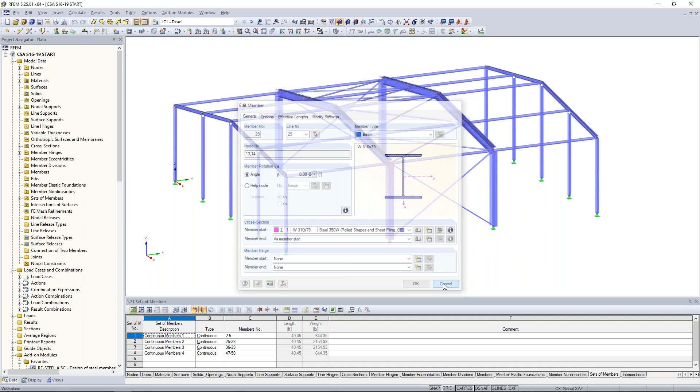Material is steel 350W. The member type is just a typical beam member, so this would be any type of beam or column. Everything for these frames is fully fixed, so the member hinge is set to none, which just means that all forces will be transferred where they're connecting to other members. If we take a look at the exterior members, on either the left or right side, similar concept.

We have moment frames here too, but a much smaller member, a W130 by 24, steel 350W. Member type is set to beam, fully fixed.

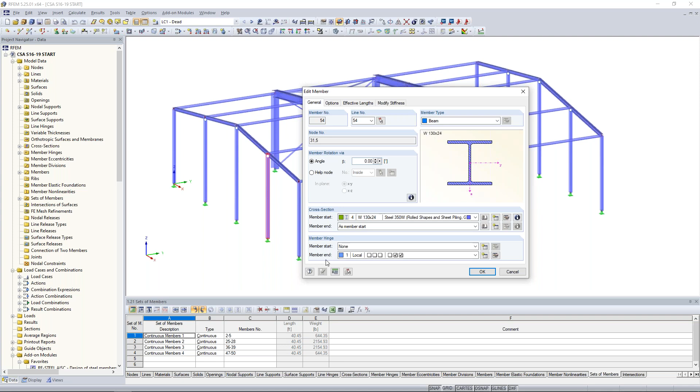For our interior columns though, you'll notice we have a special symbol at the top, and all I've done for these W130 by 24 is apply a moment release at the top of the member. That graphic is shown here within RFEM to represent this moment end release that I've set directly within this dialog box.

We also have these purlin members framing in between our frames, and they are set to the member type truss. The member type truss just means that essentially we're going to apply that moment release internally for the calculation, so it's grayed out down here at the bottom because the program will automatically apply that for us. These are just typical HSS 127 by 4.8 steel 350W sections.

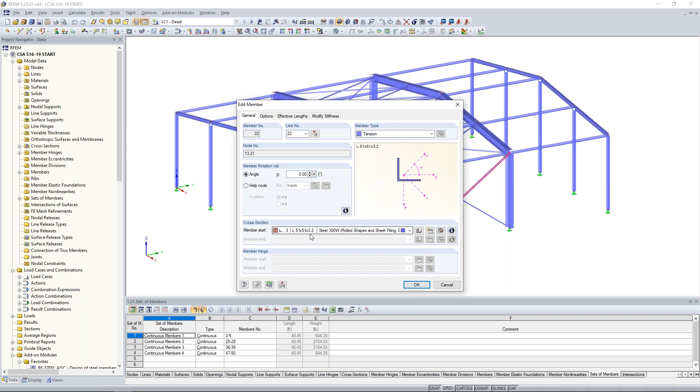Now, in a similar sense, we also have our lateral bracing here. If I double click on this member, these are single angles, L51 by 51 by 3.2, steel 300W. The member type here is set to tension only, so this member can only take axial tension forces. If it has any compression, it will automatically be removed from the iteration.

RFEM will allow this member to be reactivated if a tension force is reintroduced to it. And once again, we're going to apply those moment releases at both ends as well as shear releases, so it's only transferring those axial tension forces.

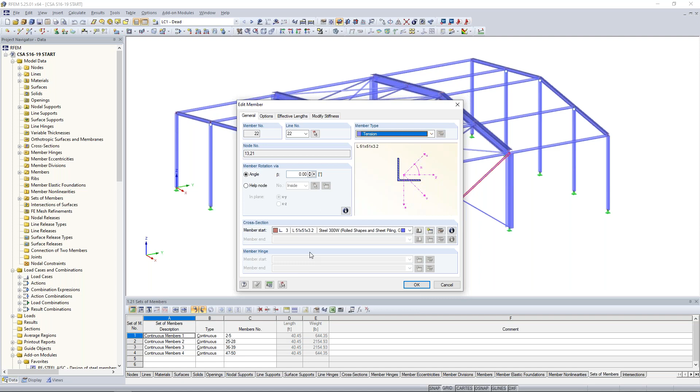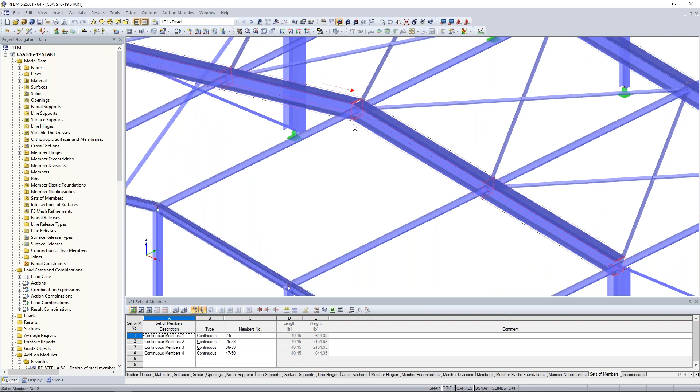Now you'll also see that the main rafters here are split into individual segments, and this is fine for analysis purposes, but later on when we get into design, I'd like to consider these as one continuous member. So what I've done is hold down my control key to select all 4 of these segments, and right click to create what's called a set of members. All this does is group together these individual segments for design purposes. It does not affect the analysis whatsoever, and this will make more sense once we get into the add-on module. You can see the symbol here, a faint dotted line grouped around these 4 individual members.

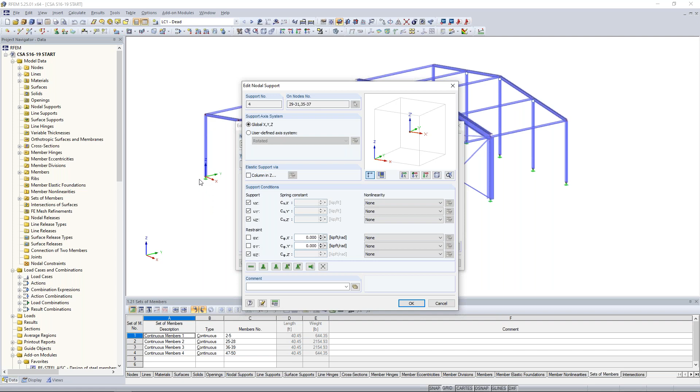Down at the bottom, you'll also notice we just have typical nodal supports applied. If I take a look at the detail settings, we have 6 degrees of freedom. I applied a support within translation directions X, Y, and Z, and also added a restraint for rotation about the column's own axis, so it's not free to rotate in torsion. That summarizes a brief introduction to the steel members, the materials used, and the types for this example.

So what we'd like to get into next is just a brief introduction to the loading. I'm going to turn on my load cases and combinations dialog box, and you'll notice I have created 4 load cases: dead load, snow load, wind in the X, and wind in the Y. Now all of these are set to the action category according to the NBC standard, which affects our load factors for our load combinations. Nothing too complex here.

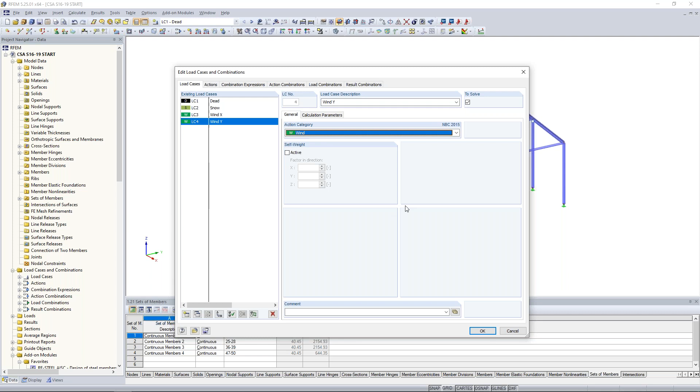Once we have set up these load cases, we need to actually apply the loads within RFEM. So I go back to my graphical display and notice I have dead load selected within my drop-down box. Now I can turn on my loads graphically that I've already applied to the structure. Notice I have just a point load at the top of each one of these columns, and I also have a distributed area load.

I created this automatically within the program. Under Tools, Generate Loads, we can create an area load on members via a plane. Within this dialog box it's really quite simple - I'm just applying a magnitude of negative 0.02 kips per square foot in the global Z direction, and then I select my corner nodes that it's going to apply for this plane back here in RFEM for the roof.

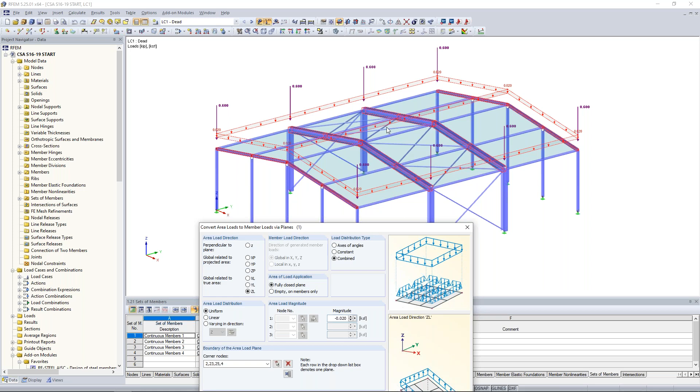Now I took it a step further and said, okay, I'd like this area load to only be applied to my main rafters here, not the smaller purlins. So I can take any one of those purlins, graphically select it, such as member number 33, and then all purlins parallel to member number 33 will automatically be deselected when it comes to this area load. If we take a look at this generated area load, I can right click and display separately, and notice only the rafters are affected here. The magnitude is given to me before I run the calculation, just based on the tributary area of each one of these sets of members.

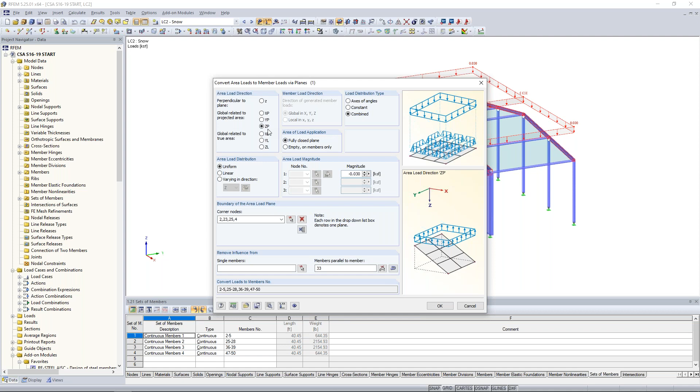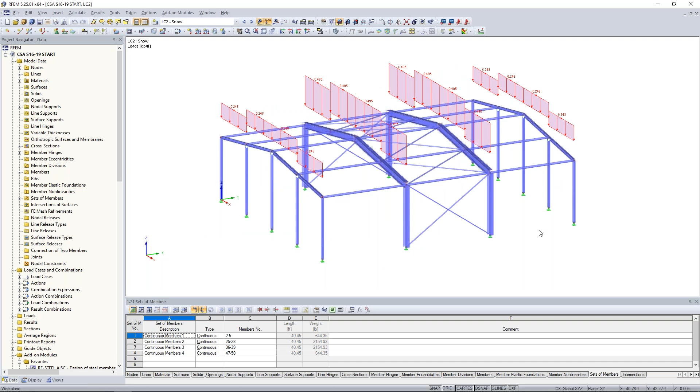Now I also created this snow load in a very similar fashion - this was also a generated area load. The difference is I wanted to change the magnitude slightly to 0.030 kips per square foot, and I applied it in the projected Z direction. The difference between projected versus global is that we take into consideration the angle of this roof for the applied magnitude of the snow load. If we have a very steep angle, we'll see less snow load than on a roof that was completely flat. So when we take a look at this generated area load, we can right click to display separately, and here's our projected snow load on each one of those rafters.

So I've also applied a wind in the X direction, pretty simple application here. According to the global X axis, we have our wind flow from left to right. Over on the left for our pressure face, these are just standard member loads that I've applied to each one of these members. Over on the right-hand side, we have a suction force, again with those typical member loads.

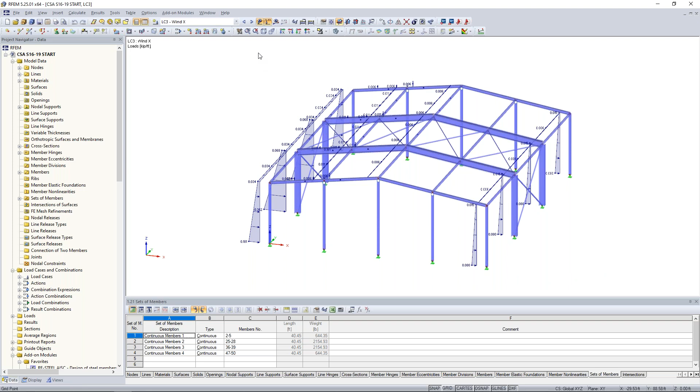Wind in the Y, a similar concept, except we're going to have wind flow according to the global Y-axis from right to left. We have our pressure face over here on the right with member loads, and then a suction force on the left with those member loads.

So now that we have created all of our load cases, the next thing to do is combine them into load combinations. When I first created the model, which we can access under the General Data tab by right-clicking on the model name, you'll notice that I selected the NBC standard to automatically generate my load combinations. Within this dialog box dropdown, we're also seeing the ASCE 7, the IBC, Eurocode, and other international standards.

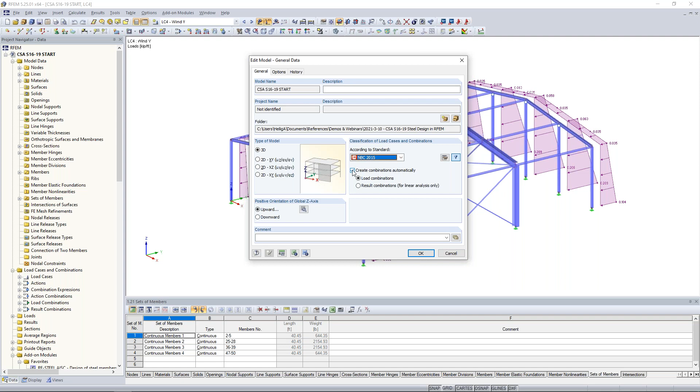When I have this option checked, we'll automatically generate load combinations according to the standard selected. I also have the ability to uncheck this option and instead manually create my load combinations. Once we have our standard selected, we go back into our load cases and combinations, and jump to our combinations expressions tab.

The program's telling me it's going to generate those factored load combinations according to the NBC, our ultimate limit state. If I'm curious to see those, I can click on this info button, and see directly what the NBC calls for in terms of those factored load combinations.

We also have our serviceability, or unfactored, load combinations listed here. According to the NBC, we have a few different options for serviceability, and again we can click on this info button to see exactly how those will be generated.

Most importantly is to jump to my load combinations tab, where we can see our factored load combinations generated here in red, and our unfactored ones in green. This is only considering the load cases that I input under that first tab — dead, snow, and wind.

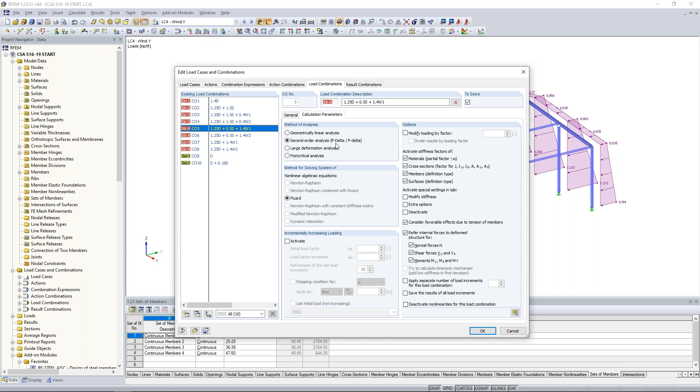Now, it's important to know that under the calculation parameters, by default we're automatically going to consider a second order analysis for all load combinations. You can change that here, but most standards — which we'll get into in more detail in a minute — do require a second order analysis. RFEM will consider big P-delta and little p-delta effects when we select this option.

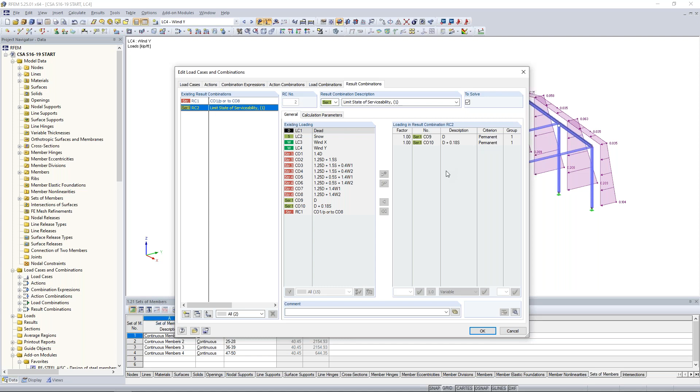And finally, we have a results combination, which is nothing more than an envelope solution. So we have a results combination for our factored load combinations and one for our unfactored load combinations. This will provide us with the max and min internal forces, deflections, and so on, if we view these within the program after the analysis.

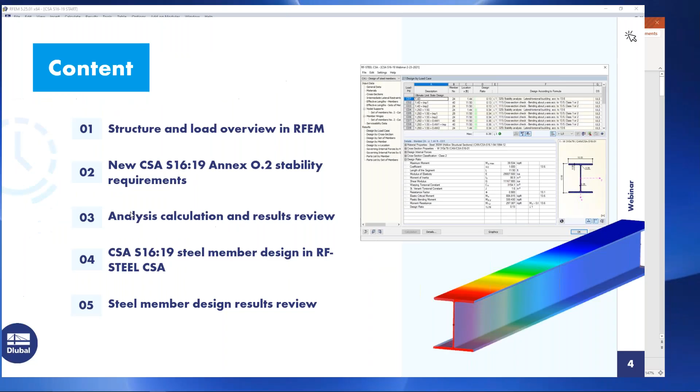So now that we have gone over the initial modeling and the initial loading, I want to jump back to the PowerPoint to begin our discussion about stability considerations.

If we refer to the CSA standard, and in particular clause 8.4, the code tells us we must consider structure stability for the overall design. These stability requirements are elaborated on in clause 8.4.1. We should consider deformations, big P-delta, little p-delta, geometric imperfections, stiffness reductions, and uncertainty in stiffness and strength.

There are actually a couple of different methods of analysis and design for stability, provided in clause 8.4.2. The first, which is nothing new and has existed within the CSA, is this simplified stability analysis method according to 8.4.3. Most of us today who have done design according to the CSA standard should be quite familiar with this section.

But what has recently been added within the 2019 standard is Annex O, and in particular Clause O2, which now defines an alternative method for stability consideration effects for an elastic analysis. We're going to get into this quite a bit more today and apply it to our example.

But before we do, I want to cover the simplified stability requirements. Most of us should be familiar with this according to clause 8.4.3. This is the initial method, and it only has a couple different requirements listed here. The first is to consider big P delta effects according to 8.4.3.2.

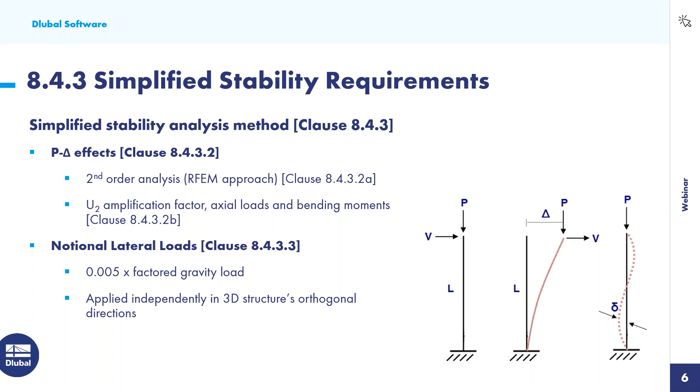It's important that these notional lateral loads be applied independently in the 3D structure's orthogonal directions, and in such a manner that we're getting the greatest destabilizing effect. So let's say we have lateral load for wind in the X direction—it makes the most sense to apply these notional loads in the X direction as well for the greatest destabilizing effect. For wind in the Y, we'd apply a notional lateral load in the Y direction as well. That's really just a quick overview of this simplified stability analysis method, but let's get into the new Annex O.

In particular, we're going to refer to stability effects and elastic analysis according to Clause O2. So there are a few different requirements here.

The first is geometric nonlinearity, for second order effects that are required. Annex O says we must consider big P delta effects, but here it also mentions P little delta effects. Now, there are conditions to neglect P little delta, given in Clause O2.2, A through D. So if you meet one of these conditions, you don't necessarily need to consider those small deformations occurring along the member length.

But we might ask ourselves, what's the advantage if I do include P little delta effects within my analysis? What we get to do is actually set this U1 factor equal to 1.0. This U1 is an amplification factor used in Clause 13.8 for member strength and stability design, applied to the required moment force. It's a factor to account for second order effects due to the deformation between the member ends. So it makes sense that if we can account for P little delta, we can increase this factor so that we consider it in the analysis portion instead. Now, as I mentioned before, we saw this dialog box on our right.

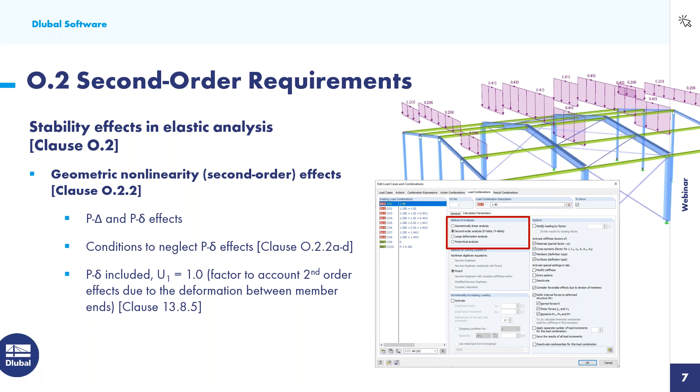Moving on to our second requirement, which refers to geometric imperfections given in O.2.3. The code says that member and local geometric imperfections can be completely neglected for an elastic analysis. So what exactly is a local geometric imperfection?

I've put a nice picture here of what that might mean. This is where we would actually deform the FE mesh along the member length to account for these uncertainties, these local geometric imperfections, maybe from manufacturing, for example. But the code tells us we don't need to consider this, which is helpful because it can be pretty time consuming. What we do need to account for, though, is global geometric imperfections.

We have a couple of listed methods here that we can follow. Now, there are scenarios where we can ignore global imperfections, though, and this is for lateral load combinations, if we meet the criteria listed here set forth by O.2.3.1.

The first criteria is that we have gravity loads primarily supported by vertical elements. The second is that the first to second order story drift ratio, with reduced member stiffnesses—which we'll get into in just a minute—is less than 1.7. If we meet all of this criteria, then we can forget about global imperfections.

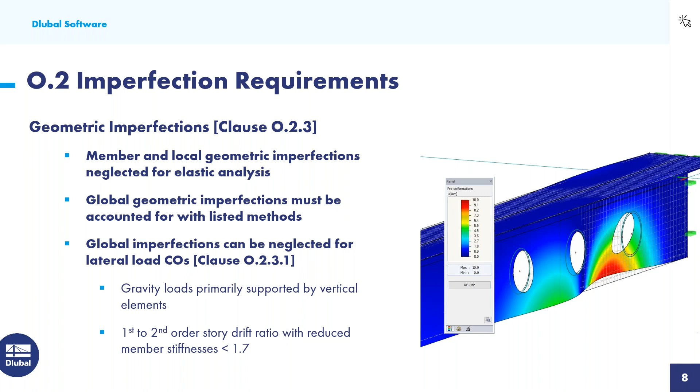Now, let's say we don't meet this criteria and we actually do need to apply the global imperfections. There are one of two methods given, again, within clause O2, and the first is direct modeling. This tells us that we must physically displace the member intersection points to account for these imperfections.

For how we would physically displace them within the model, we might refer to clause 29.3, which gives a lot of information about erection tolerance values. It's also quite common to consider column out of plumbness of 1/500.

So in addition to column out of plumbness, we might also be considering member out of straightness, again trying to consider the most destabilizing effect. But this becomes very difficult, because we're going to have so many different scenarios of physically displacing these intersection points to consider that worst case scenario.

So we're going to have multiple different models. Essentially, we're applying four different displacements in four different directions at each story level. Each member out-of-straightness effect needs to be considered with the relevant out-of-plumbness effect of the column, so this becomes pretty time consuming.

So the more practical method might be method number two here, for notional lateral loads, given in clause O.2.3.3. For this method, instead of directly modeling them, we can apply these notional lateral loads with a magnitude of 0.002 times the factored gravity load.

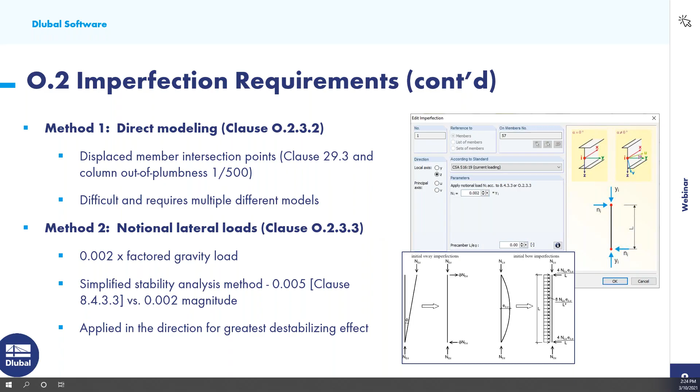While this is fresh in our mind, let's jump over to our RFEM example and apply these notional or imperfection loads directly to the structure. So what I'm going to begin with here is to create a new load case.

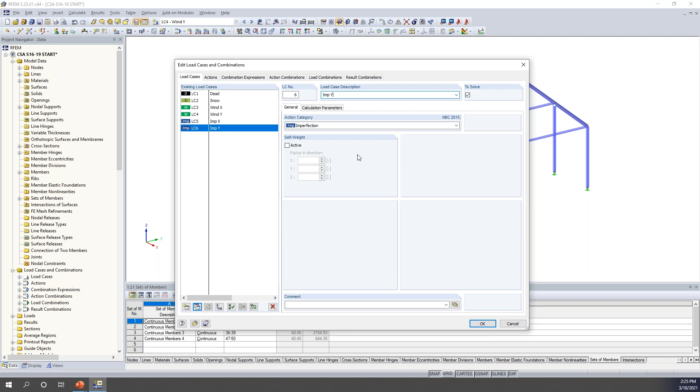The load case is going to be called Imperfection in the X, with the action category set to imperfection. I'll make a copy of this and call it Imperfection Y, again with the action category set to imperfection. So I've created these two load cases, but similar to my loads above, I need to also apply this directly to the structure itself.

I'm going to make sure I have Imperfections in the X selected here from my dropdown, and go to Insert, Loads, Imperfections, Graphically. This brings up the same dialog box that we just saw in our PowerPoint.

From here, we can select the CSA standard, the 2019 version, that was recently added to this option. Notice we have two different options here: the current loading or the gravity load combination. Under the current loading, we'll take the current applied axial load for each member and use that for the notional load. The alternative option is the gravity load combination, where the program refers to a specific load combination that I select here within my dropdown for the applied gravity load.

In our case, we're going to use the current loading, and notice the program automatically refers here to the simplified method 8433 or Annex O233. Our value set out in front here is 0.005 - remember, that's for the simplified method. If we're following Annex O, we're going to change this to 0.002.

And the picture explains quite clearly what's happening. I'm going to take this applied axial load in the member, Y sub I, multiply it by this 0.002, and then take that value and apply it at the top of the member as a notional lateral load, N sub I. Keep in mind we're going to apply an opposite and equal lateral load down at the bottom of the member, because we don't want to see higher reactions at the base. We're only trying to affect the member along its length.

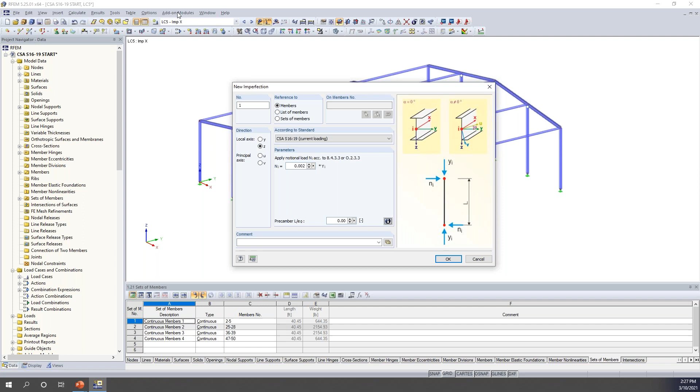So the final thing to do is to apply this imperfection related to the member's local Y or local Z axis. For our Imperfection in the X, I'm choosing my column's local Z axis. I click OK.

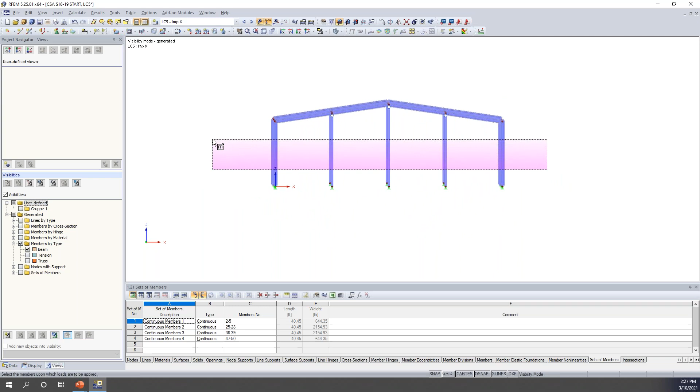Under my Views tab, before I apply this to each of my columns, I'm going to activate only my beam elements, so my truss elements, my tension-only members, are completely grayed out. This way I can take a look at an elevation view and apply that imperfection here only to my vertical columns. Now we have a nice symbol, and I'll turn this to wireframe view so it's a little easier to see. We see this imperfection with the magnitude 0.002 that will be taken into consideration for these members according to the global X-axis.

Now for imperfections in the Y, or notional loads in the Y, exact same process. Under Insert, Loads, we go to Imperfections, Graphically - nothing changes here. The only thing we're going to do is apply this to the local Y axes instead.

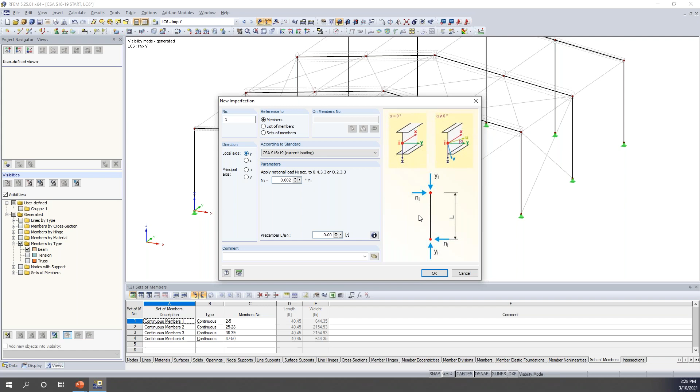By the way, if you need to quickly orient the imperfection or notional load in the opposite direction, just add a negative in front of this coefficient. So for imperfections in the Y, we're going to apply these according to the local Y axes of the members. I click OK, and then once again I'm going to select all of my column elements here. You'll notice this imperfection is now according to the global Y axes.

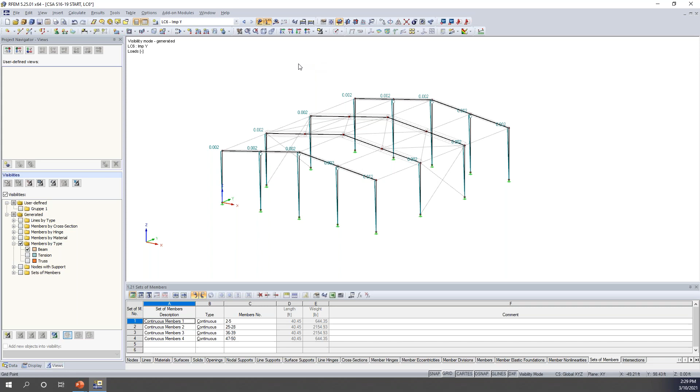So we have efficiently applied these imperfections to the structure, but now we need to combine them with our other load cases within our load combinations. I can do that by jumping to my load cases and combinations, and under my combination expressions - which we've already visited this tab - there's the option here to apply the imperfections we just created to these load combination expressions.

So when I check this checkbox, you'll notice that automatically this dialog box is brought up and it says, okay, we notice that you have two imperfection load cases that you created, imperfection in the X and imperfection in the Y. Do you want to use both of them for our factored load combinations? Yes, we'd like to use both of them.

I'm going to take this one step further to activate this option down here, subject to a specific load case. Remember, we're always creating the greatest destabilizing effect. So imperfections in the X should be applied with wind loads in the X. I never want the imperfection in the X to be applied with wind loads in the Y. It makes no sense. It's not the worst case scenario. All we're doing is creating additional load combinations that really aren't useful for us.

So we can filter those out by selecting this option to tell the program never to use my notional load in the X with winds in the Y. So LC5 will never be used with LC4. In a similar manner, for my imperfection in the Y, I'm going to select the option here to never use this imperfection with load combinations that have wind in the X. And I click OK. So this will be taken into consideration. We'll see in just a minute under our load combinations tab.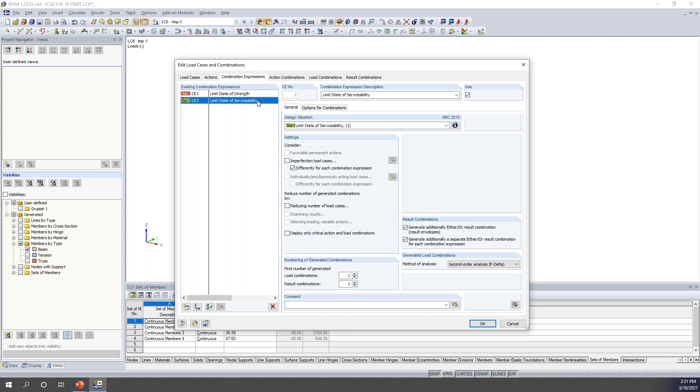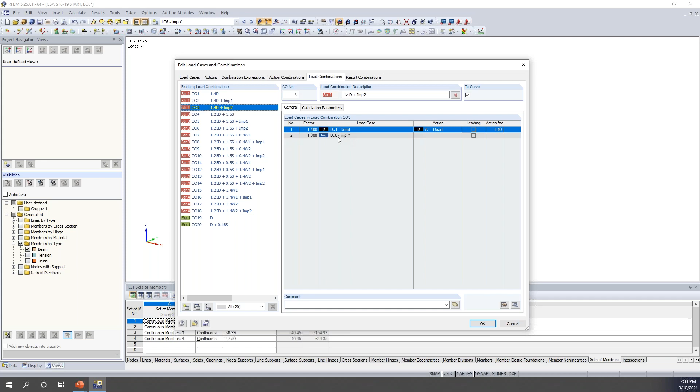Well, under the load combinations, you'll notice that this list looks quite a bit longer. So we want to ensure that these notional loads were accurately applied to these load combinations. If we take a look at a gravity-only load combination, so 1.4 dead, and then the load combination right below it, now I'm seeing 1.4 dead plus imperfection in the X. Then I also have a third load combination here, that's 1.4 dead plus the imperfection in the Y. So we're going to consider all those scenarios for this gravity load combination.

But if we jump down here to one of our load combinations with an applied lateral load, such as wind in the X, for load combination 7, we see dead plus snow plus wind in the X. Well, load combination 8 is dead, snow, wind in the X plus imperfection in the X. We will not see wind in the X with an imperfection in the Y. Again, it doesn't make any sense. This isn't the worst case scenario, so we don't need to have additional load combinations here.

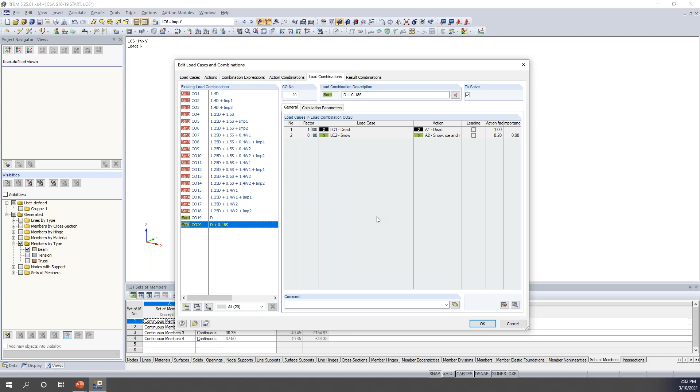We take a look at our next load combination. We have dead, snow, wind in the Y, and then we have dead, snow, wind in the Y with our imperfection in the Y. Now, sure enough, with our serviceability or unfactored load combinations, no imperfections are considered at all. So this is exactly the scenario that we wanted. We've accurately applied those notional loads to the structure.

Okay, so we can also view here graphically those imperfections, the snow load, wind loads, everything applied to the structure at once if we're interested in seeing this graphically all together.

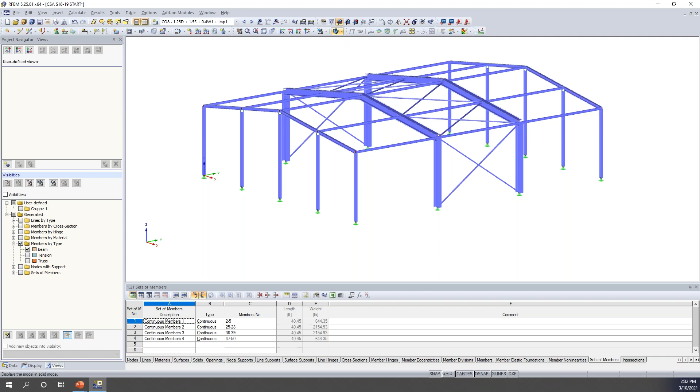So now that we have applied our notional lateral loads, let us go back to the PowerPoint here to discuss the last requirement according to clause O.2.4. And this is reduce member stiffnesses.

Now, we reduce the member stiffnesses when we are applying stability according to this method here with Annex O. And we want to account for the initial geometric imperfections, the inelasticity, and uncertainty in stiffness and in strength. So what we'll actually find is that there are a lot of similarities here with these requirements to the direct analysis method given in AISC Chapter C. But there's also some big differences as well.

So the CSA states that we must reduce the member's axial stiffness, EA, and the flexural stiffness, EI, by a couple of factors. The first is a 0.8 reduction factor, so that's pretty easy. But we must also consider a tau sub B factor, and this is actually dependent on the factored axial force, C sub F, and the axial strength of the member, C sub Y. We use these equations shown here in the lower right direction, directly from the CSA standard, to calculate tau sub B. We can see the higher that ratio is, the smaller that tau sub B factor is going to reduce our stiffness.

But for pretty low ratios, tau sub B is just going to be equal to 1.0. Then we apply both of these factors to EA and EI of the member. Now, a big difference when we compare to the AISC direct analysis method is that tau sub B and 0.8 are certainly applied to the flexural stiffness, but we are also going to see that tau sub B applied to the axial stiffness within the member. So that's a pretty big difference.

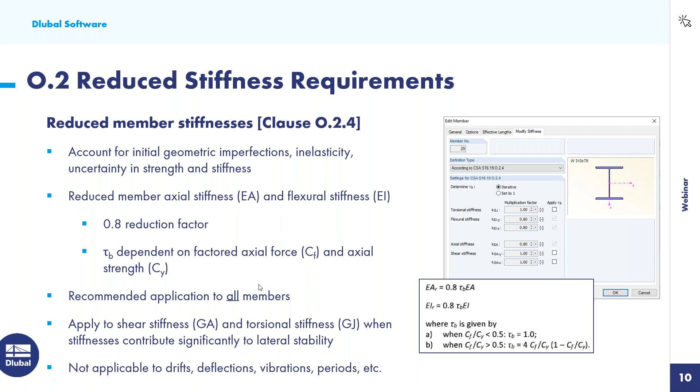Now, it must be noted that the stiffness reduction should not be applied when we're considering drift, deflections, vibrations, periods, and so on. So what this means for us today is that for our serviceability load combinations, we should be considering the full stiffness of the member rather than reducing the member stiffness according to O.2 here.

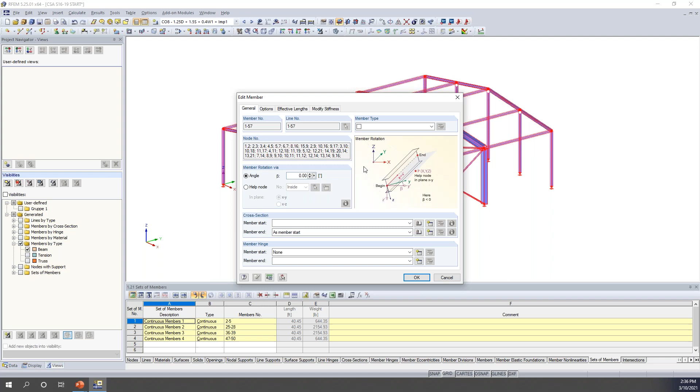So once again, let us go back to our structure and we will apply these stiffness reductions to the example today. As I mentioned, we're going to take the code's recommendation and select every single member here within our model. And then if we simply double click on any one of those members, we have this modify stiffness tab. By default, the definition type is set to none, meaning we're not going to apply any stiffness modifications to the structure. What we're going to do is select the CSA standard S16 2019 that was recently added. This is referencing again clause O.2.

Notice tau sub B is listed here and the default is set to iterative. All this means is it's going to refer back to the standard for those formulas to take into consideration the axial force to axial strength ratio and to calculate what tau sub B should be.

Then we also have our 0.8 factor, and that's just listed in this first set here. Notice that the flexural stiffness and axial stiffness are grayed out. That is because this is a code requirement. So when you choose the CSA standard, we're automatically going to assume that you will be applying the stiffness reduction to flexural and axial stiffness.

But we do give you the option here, which is unchecked by default, to check the stiffness reductions, both tau sub B plus the 0.8 factor, to the torsional stiffness as well as the shear stiffness. So if that's an approach you want to take, you can manually turn on those checkboxes here. Now for today, we'll just be applying this to the flexural stiffness and axial stiffness. I click OK, and now automatically every single member within this example will have a stiffness reduction applied.

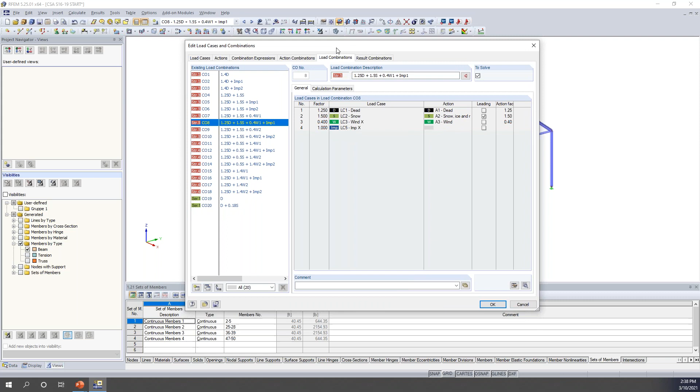But keep in mind that we said for our serviceability load combinations, I actually want to consider the full member stiffness. So how can we do that? Well, remember under the calculation parameters where we set the second order analysis for all these different load combinations, you'll notice by default that it is automatically activated. The program will consider these stiffness reductions, whatever we set in that dialog box we were just looking at for members automatically. So it's automatically going to consider the stiffness reductions for every single load combination here.

All this means is that we can jump down to our serviceability load combinations. We can highlight both of them with our shift key, and we simply turn this off. So now the full stiffness of the member will be used for only these two serviceability load combinations. But when we jump back to our ultimate limit state load combinations, this option is checked again.

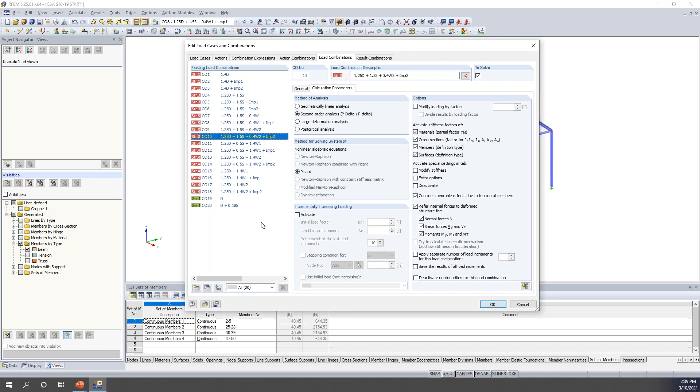So that's how we can easily consider full stiffness versus the stiffness reductions for different load combination considerations. Okay, so we have finally applied all of these different requirements to our model based on the new stability within Annex O. We're finally ready to run our calculation.

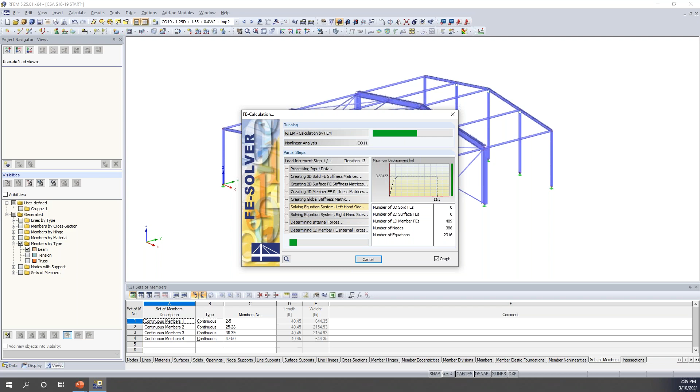So I go to calculate all, and the program's just cycling through my load cases, my load combinations, taking into account stiffness reductions, notional loads, second order analysis, and eventually we're presented here with our results.

So as I mentioned, we will be seeing our results available to us in the lower left-hand corner here within the project navigator. And I actually am looking at the global deformations here, and I can select any one of my load combinations just to cycle through these.

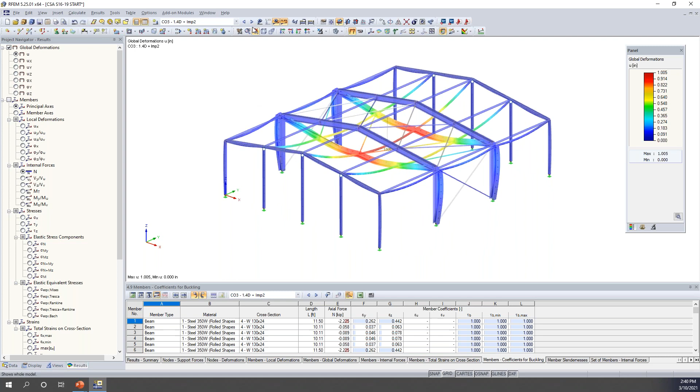And I think deformation is important just to get an understanding if we properly modeled everything, the loading is correct, so that we're not seeing extremely high deformations, we're not seeing anything fly off the page, and everything looks well modeled here for this scenario.

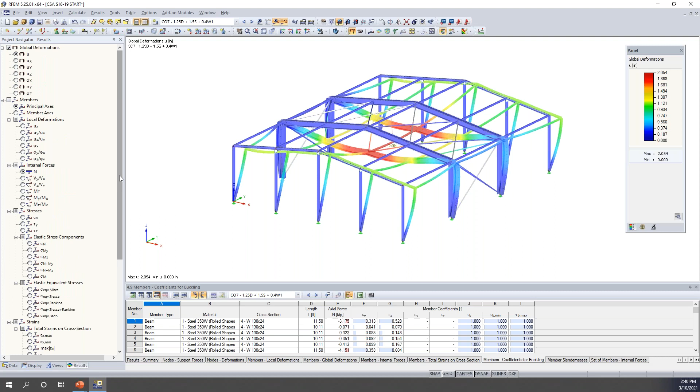But we know for steel member design, what we're most interested in here is the member internal forces. So what I can do is to activate my member internal forces within my project navigator. And for the sake of simplicity here, let me just select one of these moment frames, and I will select the visibility by the selected object here.

Can zoom in. So I'm currently viewing the member axial forces along the full member length here for this frame. We also can activate shear forces in the weak axis direction, the strong axis direction. We can take a look at bending moments, for example, in both the strong and the weak axis direction.

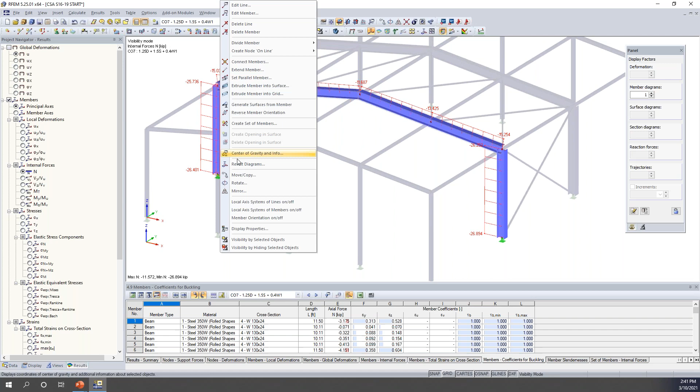Now, for any one of these members, we also have the ability here to right-click on the member and view the results diagram. So this results diagram just allows me to turn on and off these internal forces or deformations, and we can see in a bit more detail what's going on along the member length. We can even cycle through to these different load combinations here at the top.

Now we have the ability to average out regions, to smooth regions. We can export this information to Microsoft Excel. We can add it to our printout report. So quite a bit of information here.

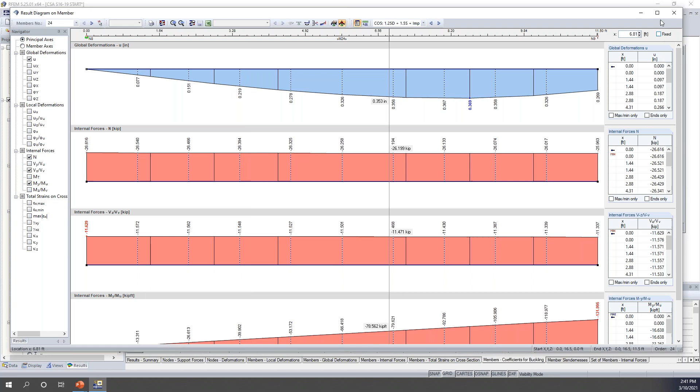Now, everything has been shown to us graphically so far with our member results, but we also can view the internal forces within table format. So if I go ahead and increase my table down here at the bottom, and I want to take a look at table 4 for my results.

And down at the bottom, we have these different tabs here. What's also nice is I can right click on any one of these tabs to just see a quick list of all the tabs available to me. Now notice a lot of these are grayed out because they're relevant to surfaces, which we only have members for today's example. But I can jump to my members' internal forces.

And when I'm within this dialog box, you'll see that everything is synced up in the background. And I'm currently viewing my max forces for the load combination selected here, such as my axial forces, my shear, bending moment, and so on. And that big red arrow is showing me exactly where the controlling internal force is for that particular member.

Now, in turn, I only have this frame activated graphically, so I can also select any one of these members and the table will jump to that particular member. And then we can take a look at here any of the information in a bit more detail.

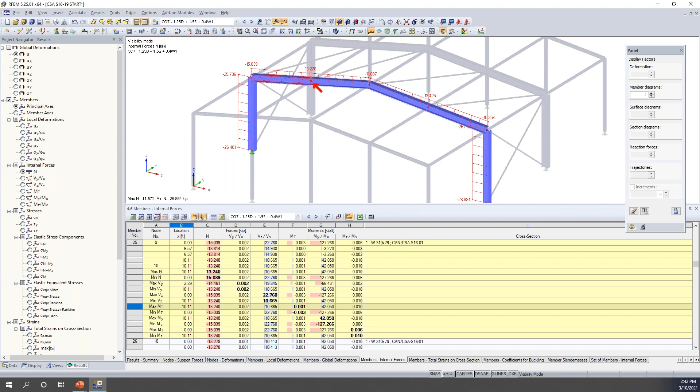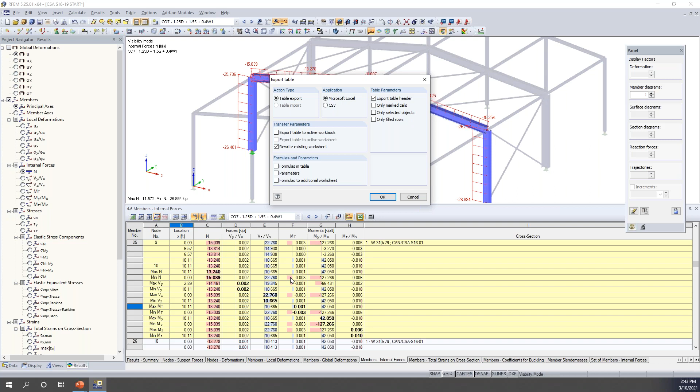Now, the member internal forces are what we're going to want to use for our design purposes according to the CSA standards. So we have the ability here at the click of a button to export all of this information directly to Microsoft Excel. So let's say we have our own in-house tools, we have Excel spreadsheets, or we'd like to do the design outside of RFEM. That's certainly possible, and this is a helpful feature that will allow you to export all of the needed information.

But for us today, I'd like to make the clear distinction that we'd want to utilize the add-on module RF-STEEL CSA for our member design.

So what we're going to do to access this add-on module, which is still integrated within RFEM, is to jump here to our list of add-on modules within the project navigator. You can see we can always right-click on a module and select it as our favorite to jump it up to the top of the list.

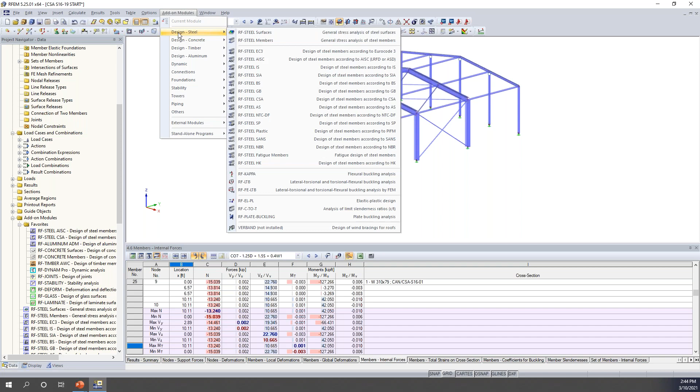This is a little bit overwhelming because clearly there are a lot of add-on modules. We can always access any of them, categorized according to their material, within this drop-down option. So we'll choose Design for Steel, and we will launch the Steel CSA add-on module.

Now, this is just a dialog box that pops up within the main program RFEM here. I don't need to worry about inputting materials, cross-sections, loading, or load combinations. Everything is brought in from that main program. What I am specifying here is information specific to the CSA standard for design purposes.

So we're talking about effective length factors, unbraced lengths, and we'll see all of that as we move through the example today. Now, the first option we want to select is over here on the right. Notice we have the 09, the 14, and now we have the 2019.

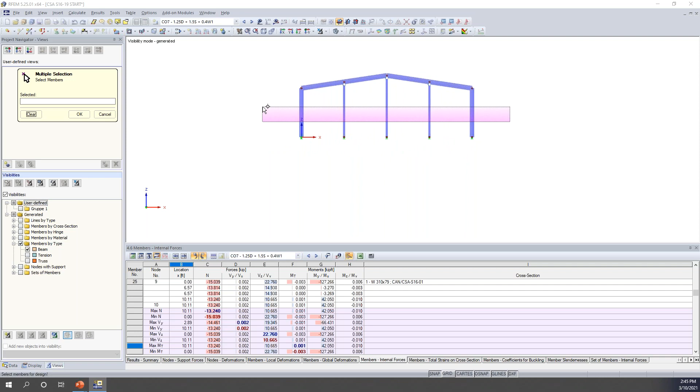Then we want to select the members we'd like to design. If you're not interested in designing all members at once, let's say we want to choose just our columns. I'm going to go under my Views tab and select just my members by type, beam. Then you'll notice my truss and tension-only members are deselected, so I can easily select those column elements here, and I click OK.

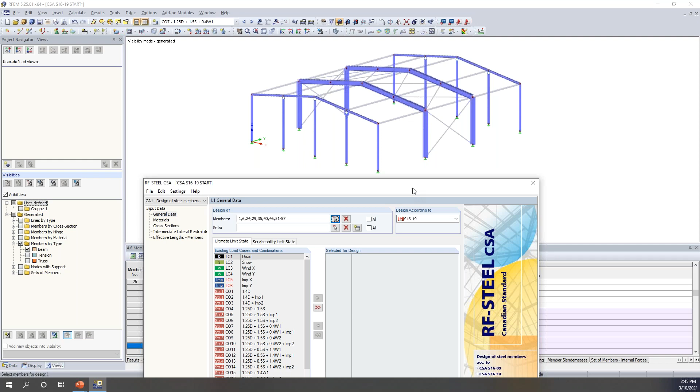You'll also recall those sets of members I created for the main rafter elements, because I said, hey, it doesn't impact the analysis, but once we get into design, I want to consider these as one continuous member. I don't want to design these individual segments. So that's why we have the ability here to design what's called a set of members.

So for this, I do want to show you one set-of-member design because it does differ from a typical member element. We'll select set of members number 2 here, and I click OK.

Then for the ultimate limit state, I'm going to select all of my factored load combinations and move them over to the right-hand side. For serviceability, I'm going to choose my unfactored load combination. This is going to be for my deflection checks that we can do directly within this model. Once I move these load combinations over to the right-hand side, I get an additional table down here at the bottom for serviceability data. We'll eventually get there in just a minute.

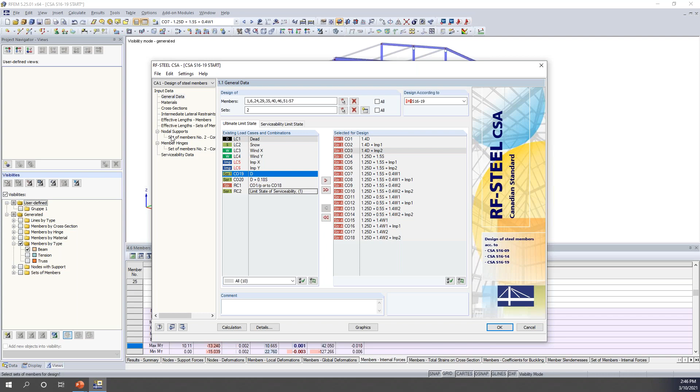But now that we've input this information under the general data, what we're going to do is simply move down our list here. So we're going to take a look at our materials. Again, brought in from RFEM, 350W, material properties are shown here.

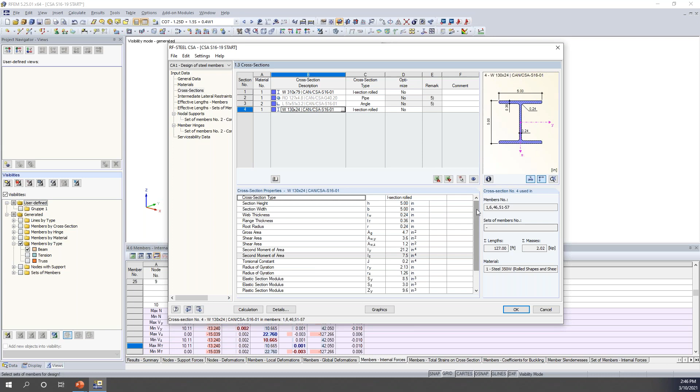Cross sections, same concept. We have our W310 by 79, and I can select that here. The program highlights which members are being applied, and I have my W130 by 24. Now, the other members are grayed out here because I have not selected them for design within this add-on module. The section properties are given to me again down here at the bottom.

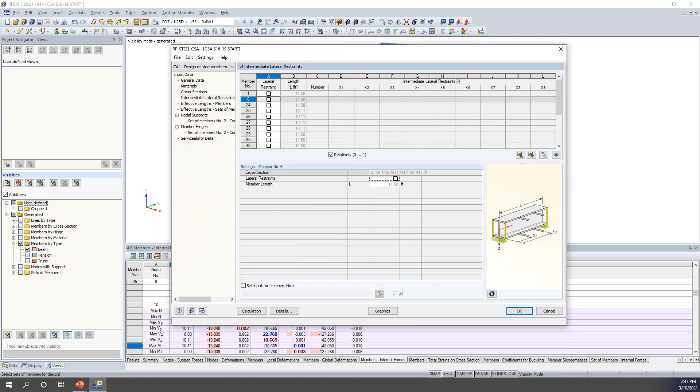The intermediate lateral restraint - this is if we had top and bottom flange bracing along the member length, and this is going to impact our lateral torsional buckling stability design. For any one of these members, which again everything's synced up here in the background, I can choose member number 1, member number 6. If we had any top or bottom flange bracing, I could input the number of restraints as well as the increment they're placed at along the member. We don't have that scenario today, so we'll leave these unchecked.

Now we're moving on to effective lengths for members, and we also have effective lengths for sets of members under a separate table. So let us begin with our columns, or our members here. This is all stability considerations - we have buckling about the strong axis, buckling about the weak axis, torsional buckling, and lateral torsional buckling.

Now, if we're thinking for any one of these members, let's say we have some sheathing or whatever it may be that's bracing the member in these directions, and we're not concerned with buckling - let's say weak axis buckling - all we need to do is uncheck this option here, and the program will not consider it within the design.

Within each one of these sections, we have the effective length factor. Notice the default here is set at 1.0. You can either make that change in the cell format up here at the top, or within table format down here at the bottom. If we click on these three little buttons, what's nice is that we get a separate dialog box that pops up here.

If we decide, okay, I don't want a pin condition, but let's say I have a pin-fix condition or whatever it may be, there's a nice table format here for either the theoretical or the recommended values that we can set quickly for strong, weak, and torsional buckling considerations. So we'll leave this as 1.0 for all of our members today.

Now, the second column listed here is going to be the unbraced length. And we all know how important unbraced lengths are. By default, the program will set this to the full member length that it knows within RFEM. But if we have any connection points, any other members framing in, bracing this particular member at something less than the full member length, then we would definitely want to input that length here. This drastically affects our capacity for stability consideration, so we'll want to adjust that if it's something other than the full member length. We'll do so within our sets of members in just a minute. But for our columns, we're leaving everything at the full member length here.

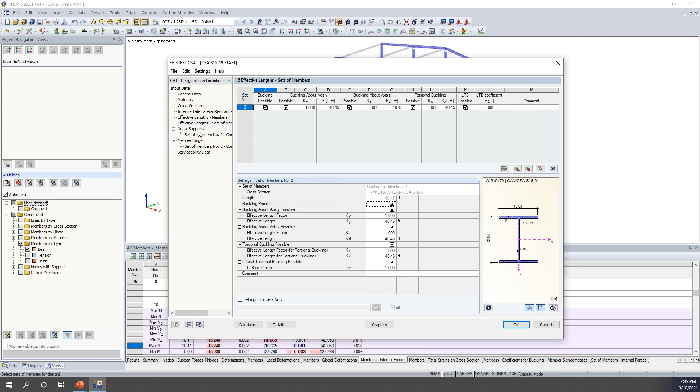But here's the difference: I'm going to jump down to the nodal supports, and this nodal supports option is only available to me when I am designing sets of members. The code, any code really for this matter, does not really address these continuous members that are not in a straight line. So this is kind of the advantage of creating the sets of members - it does need to be in one plane, but it doesn't necessarily need to be in a straight line, which is exactly what we have here.

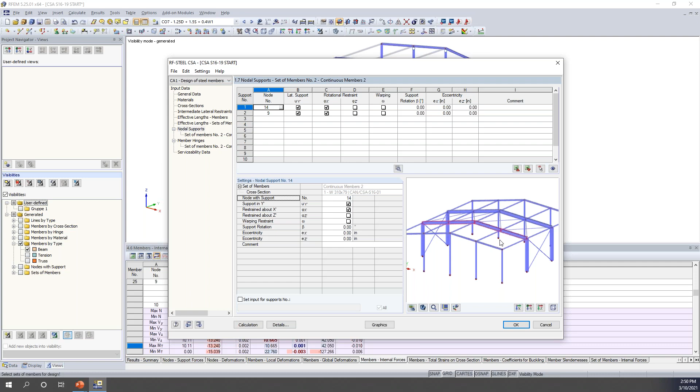But how do we design stability, for example lateral torsional buckling, when the code doesn't address a situation like this? What we do is take a more theoretical approach. We're going to take this set of members and completely extract it away from the rest of the structure, so all we're left with is this set of members just by itself here. Well, if the program doesn't know how it's framing into the rest of the structure, what we additionally need to do is set nodal supports along the member length.

What we're going to do once we set these nodal supports is run an eigenvalue analysis. This eigenvalue analysis will give us a buckling mode shape and a critical moment that we can use for the resistance, and that's what we'll be using to compare for our stability calculations. But again, we need to pay careful attention to this separate eigenvalue analysis, and in particular these nodal supports.

So if I take a look along the member length, the program has automatically assumed for my set of members number 2 that I have a nodal support at both ends - node number 14 and node number 9. If I zoom in here, I can see that node applied here. And for each of these nodes, we have 4 degrees of freedom.

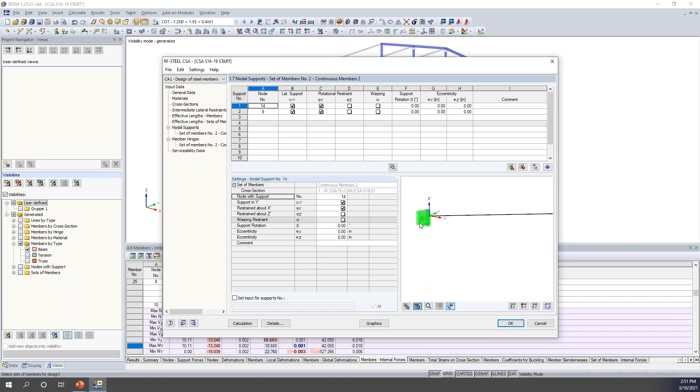We're going to assume, and currently we're looking at this node up here in the upper left-hand corner, that this member is going to be braced in and out of plane in the weak axis direction. I'd say that would definitely be the case here with those truss members framing in. We're also going to restrain the member so it's not free to rotate about its own axis with torsion - I'd also believe that to be the case.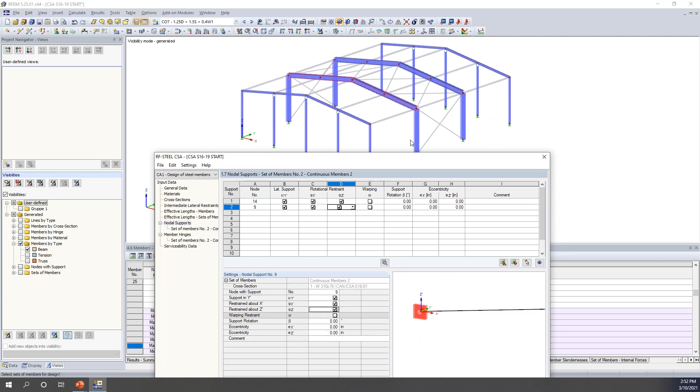I'd also say, though, that we're going to restrain the member about the Z-prime axis, this vertical axis, because we have these columns framing up on either end - it's not going to have the ability to rotate about the global Z axis either. Then we have one more degree of freedom here for warping. So if we had any warping constraint, we could take that into consideration by checking this option.

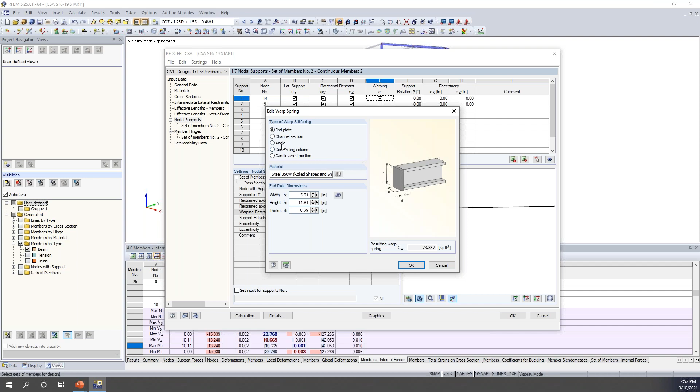With warping, we have another special detail setting here, and this allows you to set the type of warp stiffening. So if it's not fully fixed or not fully released, but we have some type of spring, what we can do here is select one of these options, such as an end plate, a channel section, or an angle.

Let's say we have an angle here that's resisting or helping to resist warping. We could set the material of that single angle, and we would set the dimensions. Just making up some numbers here: a 4-inch width, thickness of 0.25 inches, and let's say the height or depth of our beam today is 12 inches. The thickness here is going to be 0.3.

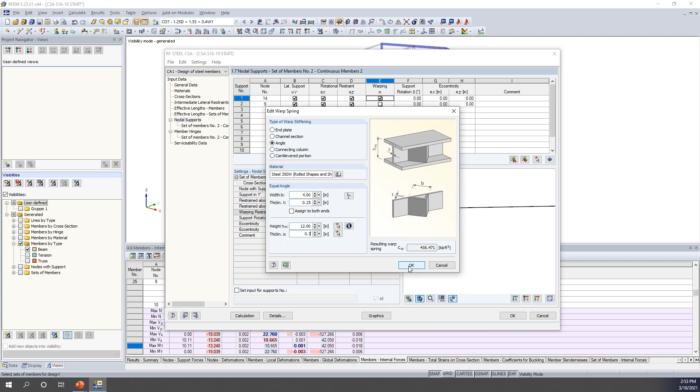Notice that the program automatically calculates this warping spring for us. So all we need to do is hit OK, and that spring stiffness is imported back into this table. That can be really effective if you have some type of spring option here.

Now we don't have any warping restraints, so we'll leave this unchecked for today. We have these nodal supports at the member start and end, but we also have these truss elements framing into the weak axis direction along the member length that we want to consider, because that's going to give us quite a bit more capacity when it comes to something like lateral torsional buckling.

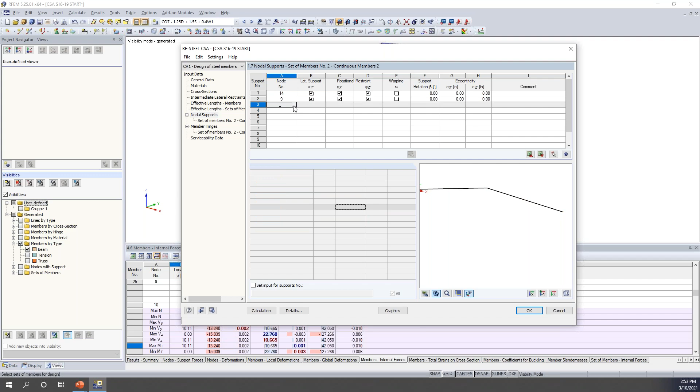What I do here is graphically select node number 10, then node 11, and finally node number 12. For each of these additional nodal supports where these truss elements are framing in, I'm assuming we are going to restrain the member in the weak axis direction, in and out of the plane. We're not going to allow rotation about its own axis, but I'm going to leave the restraint about the Z prime axis unchecked, as well as warping.

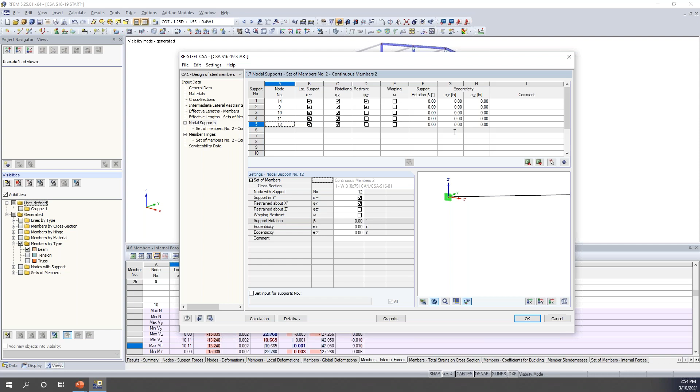We also can get pretty technical here. If we wanted to slightly adjust the angle of this rotation to get more precise, we definitely could do that, especially since this is at an angle here. We can add in an eccentricity. So all of this is possible.

Now, if we jump back to the sets of members, what I want to point out is the program doesn't default here to the full member length anymore. It refers back to those nodal supports we just set, and adjusts the unbraced length in the weak axis direction to now 10.11 feet, the distance between those nodal supports or truss elements. Same thing for torsional buckling, 10.11, and then for lateral torsional buckling, everything's controlled underneath the hood with that eigenvalue analysis, so we don't worry about anything there.

Now, when we look at strong axis buckling, you can see that the length is the full 40.45 feet, and I would say that this is correct. We have no element supporting this structure underneath it, no columns framing up that are going to brace that member in the strong axis bending direction. So we'll leave this as the full 40.45 feet.

Now, this additional table here, member hinges, is just if we had any member hinges along the set of members. I could graphically select a member and apply a shear release, moment release, or warping release. Again, this will affect that eigenvalue analysis, but we don't have that scenario, so we can leave this as empty.

Finally, we have serviceability data, which is for our deflection checks. Our serviceability load combinations are really only gravity load combinations, so I'm probably not so interested in checking my deflections for my columns, but rather I'm going to just check the deflections for the sets of members.

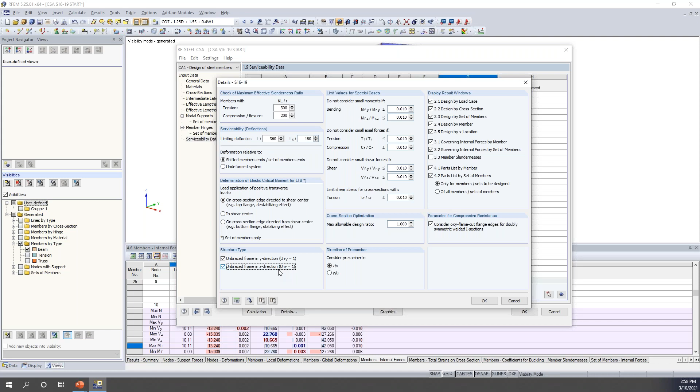There are also some other requirements within the code that if we're using the simplified stability method, forget Annex O, you also can set this U1 factor equal to 1.0 for unbraced frames, again, according to clause 13.8. So just something to keep in mind. But remember, we are taking into consideration P little delta. We are designing according to Annex O2 stability requirements, so we can leave this option checked.

So once we have defined all of this input information, we're finally ready to run our calculation. It solves within a quick second. And what you'll notice here is that we're getting the design results. We're just bringing in the internal forces from the RFEM analysis, applying the CSA equations to give us our design ratio. We can view design by load case.

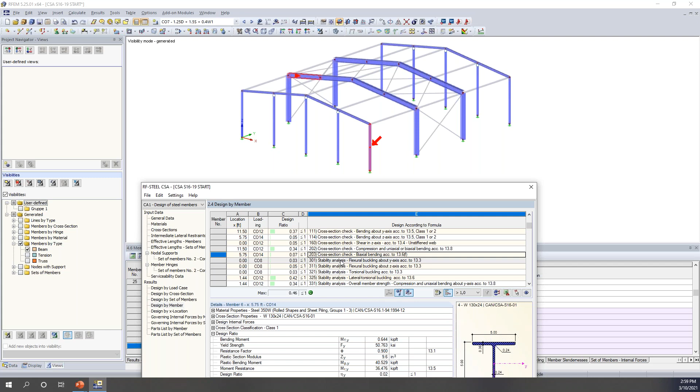We can view design by cross-section, sets of members, and members. Now for our table here, everything again is synced up in the background so that as I'm scrolling through this table, that big red arrow is going to show me exactly where that controlling internal force is for that particular check, as well as which member I'm looking at. So you can imagine with hundreds of members, it's really helpful to see exactly which member you're looking at in comparison to the table.

So for each one of these members, you'll see here that we're actually giving you a code check for every relevant section within the CSA. This includes axial compression, bending about the y-axis, the z-axis, shear, stability, and so on. And for each one of these particular results, we can expand on our table down here to view the design internal forces. We can see how the cross-section was classified. And then finally, we get our design ratio.

All of the variables are listed here, along with all of the code references directly. So we're trying to give you as much information as possible rather than being a black box program and just spitting out a number and saying it's passing or failing. But you can actually trace back to where all these variables and equations are coming from to ensure that your calculations, maybe you're doing them by hand, match the programs.

Now, we might be thinking, well, this is pretty overwhelming here. What if I'm just interested to see the controlling check for each member rather than every single check within each one of these selections here? Well, we can use our filter options here to choose only the max. We hit the filter, and now we're seeing only the max design ratio for each one of these members.

Even more so, we can take a look at this buckling mode shape. So what's happening here is this is the member right before failure where we could calculate that elastic critical moment that we're using for the design purposes. So we're kind of viewing according to those nodal supports that we said exactly how the member will fail here. So again, a little bit special with those sets of members.

Also remember, we check serviceability for this set of members. So we can view here the deflection, the total deflection, as well as the limiting deflection based on that L/360 ratio, for our design ratio of 0.46.

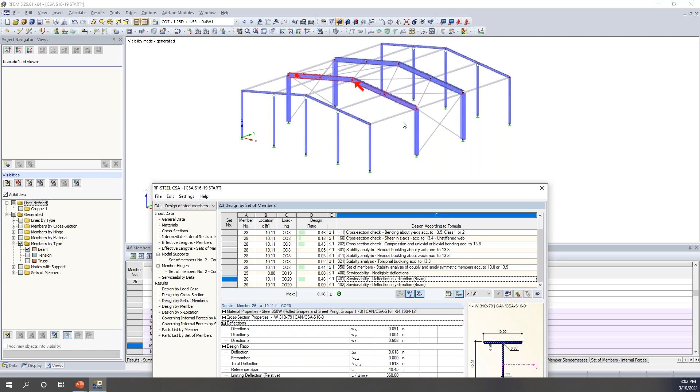If I scroll this down, sure enough, that big red arrow is pointing to where my controlling deflection is, which is where we'd expect at the midspan of this unsupported length for that set of members. So all of this information is available in table format.

We can view this graphically as well. We're technically still within this RF-STEEL CSA add-on module, just viewing our results graphically within RFEM. Here we can activate the ultimate limit state design and see our design ratios along each one of the members. We also can view the serviceability limit state, so if we're interested in seeing those deflection ratios for our sets of members, since those are the only ones we considered, we can view them graphically here.

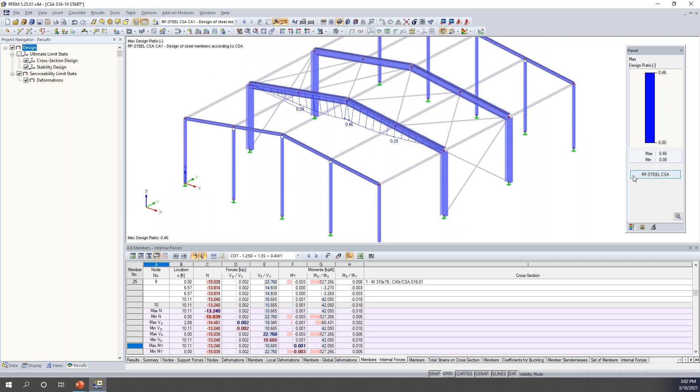The final thing I want to mention before wrapping up our webinar today is optimization. This is a common question - can we optimize? Yes. If you jump back to this cross sections table, you'll see the optimize column where you can set this to a few different options. When we set this to the current row, it will consider all W sections from the CSA standard, or we can create what's called a favorites list within our cross section database where maybe we select only a few W shapes to be chosen for the optimization process.

So once we do that, we can rerun the calculation. The program will come up with, okay, we think approximately this member will work. Then we would export that member back out to RFEM to replace the original member with the true member stiffness, rerun the calculation, and then rerun the design. So that can just be a workflow process that you can follow for optimization as well.